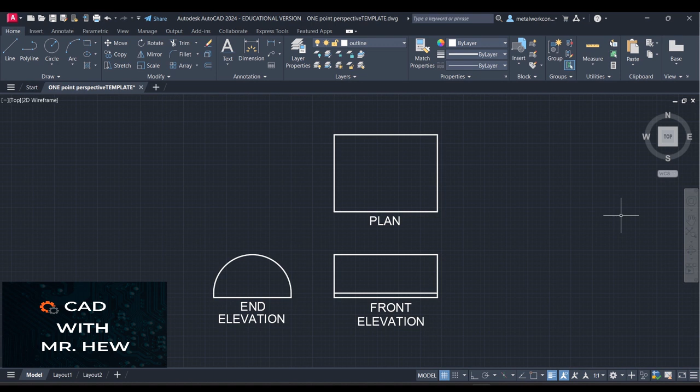In today's video, we'll be looking at one-point perspective. In a previous video, we looked at the principles of one-point perspective, and in another video we drew an object in one-point perspective. Today we'll be drawing a one-point perspective drawing, but the circle will be on the right-hand side instead of the top, like in the previous drawing. So it's a different application.

So you need to watch this video, okay? At the end you'll see what the solution would look like. On the screen we have three drawings: one labeled the front elevation, the second labeled the plan, and the one on the left labeled end elevation.

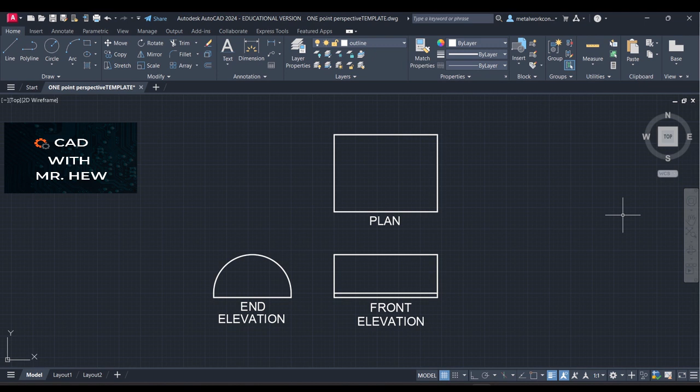Here we have a two-dimensional drawing. I want you to sketch what it would look like in 3 dimensions, a 3D drawing. Pause the video for as long as you want, but make sure you come back, because I don't want to be on the video by myself. Pause it, then come back and I'll show you the solution.

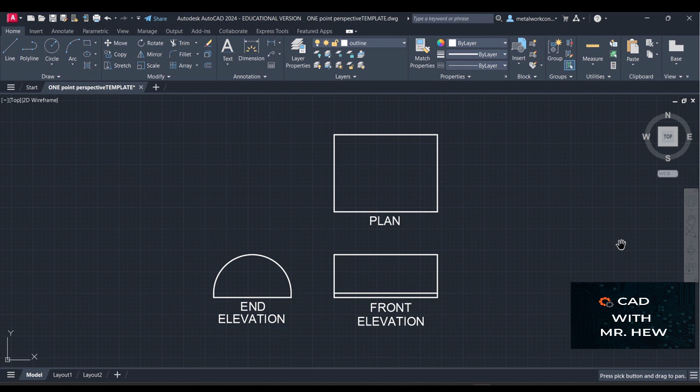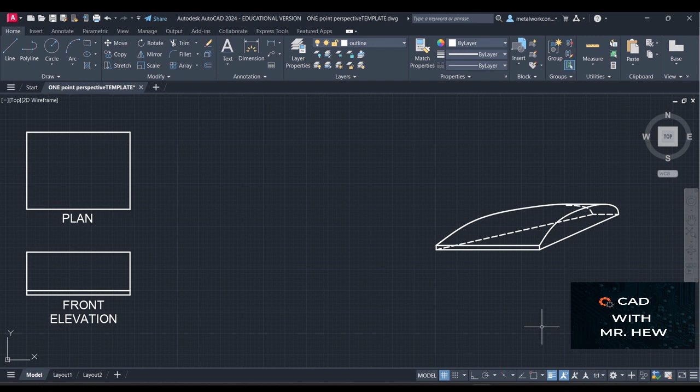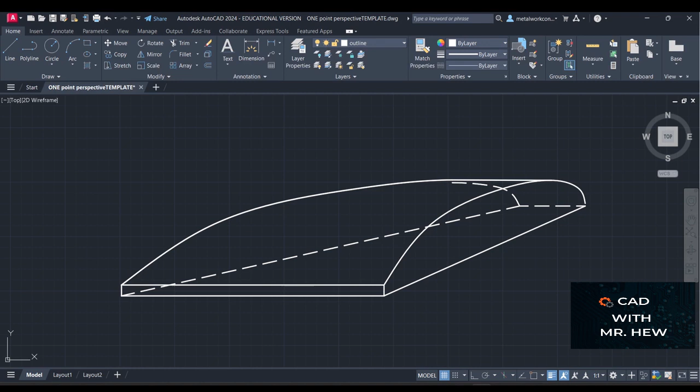Just to let you know, in my opinion your instructor might have a different perspective. These hidden detail lines, these broken lines, are called hidden detail lines. By the way, I made a video yesterday about how to draw hidden detail lines if you haven't reached that stage yet, so perhaps look at that video. In a pictorial drawing, a 3D drawing, these hidden detail lines in my opinion are not normally shown, but I put them in here just to help you visualize it.

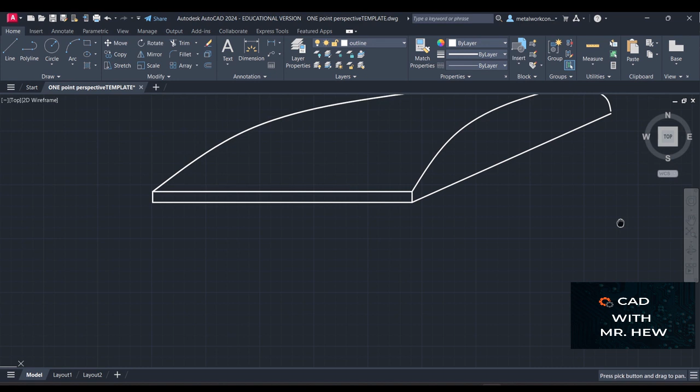Let me show you what I mean. I've removed the hidden detail lines. Does it bring clearer clarity to the drawing, what the interpretation looks like? So without the hidden detail lines, do you have a better understanding of the drawing? Yes or no?

Let us come back and see what it actually looks like. I hope the hidden detail lines make our one-point perspective a little clearer. But I'm not accustomed to seeing a three-dimensional drawing in one-point perspective with hidden detail lines at the back. I might have seen it once in a blue moon in a textbook, but I don't normally see it in a 3D drawing. I normally see hidden detail lines frequently on a two-dimensional drawing, like a first angle projection or a third angle projection.

So I hope I brought some clarity to the drawing we're doing today. Thanks again for joining us, and we know your drawings have been fabulous.

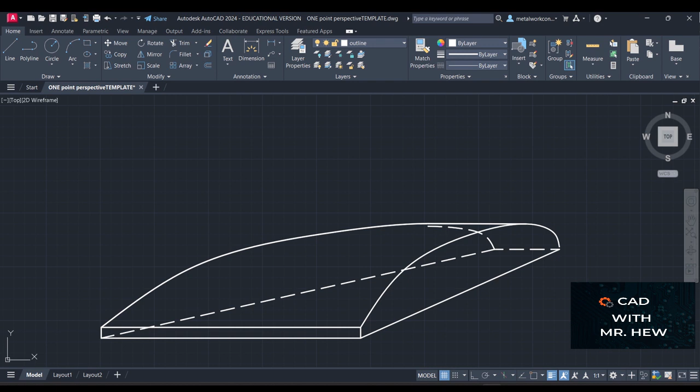Today's video looked at one-point perspective. We were given the front elevation, plan and end elevation, and I asked you to sketch what you think the 3D drawing would look like, and I also showed you my 3D drawing. Good job if you got your answer right. For those who didn't, perhaps in the next video, having built up your skills in technical drawing, graphics or engineering drawing, you'll be more settled and focused.